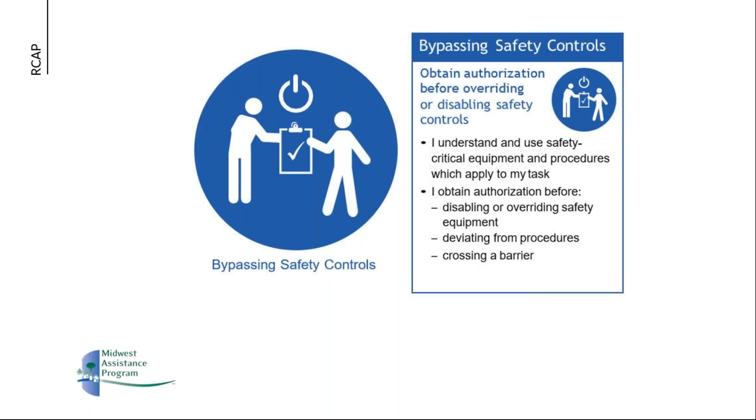Bypassing safety controls. So safety controls are frequently bypassed purely out of convenience. Smoke alarms are disabled because the work activities that we're doing are kicking up dust. Blower fans are shut off because they're too noisy, they're too difficult to talk over. Safety switches are disabled just because they're inconvenient. We must teach our staff that they are required to obtain authorization before overriding or disabling a safety control. They must obtain authorization before deviating from a procedure, and they cannot cross a safety barrier without approval.

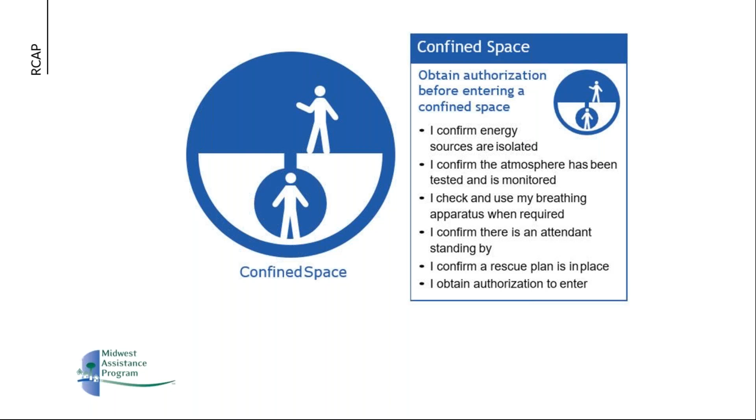I'm sure all of us are familiar with tragedies that have occurred in confined spaces. We must develop and enforce a confined space policy. Confirm that the space is energy free. Confirm the atmosphere is safe to breathe and being continuously monitored. Insist that breathing apparatus is on site and that people know how to use it. During a confined space entry, an attendant who has no other task other than to be the safety lookout must be present. Confirm a rescue plan is in place and do not enter until a subject matter expert has given their authorization.

For most of us, driving to and from work and driving while at work will be the most dangerous thing we do on any given day. Develop a driving policy. Make sure your people wear seat belts. They follow the speed limit. Reward them for slowing down when road conditions call for it. Do not allow them to use phones or other distracting devices while they're driving.

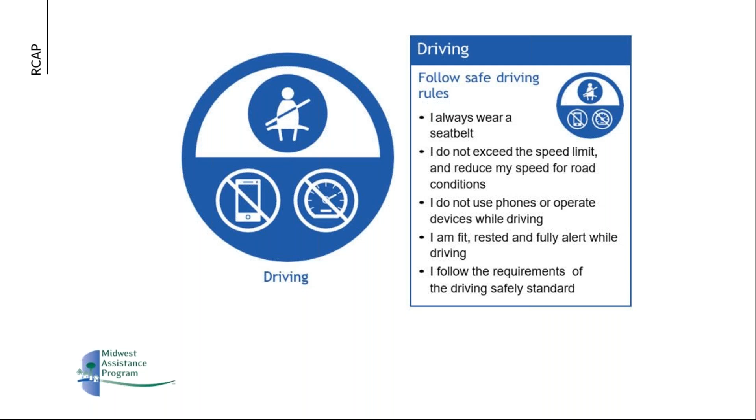Are the vehicles in good condition? And are our employees well rested? Are they healthy enough to be driving?

Energy isolation. As an industry, why do we continue to allow our staff to work on energized objects? We should be teaching them to identify all potential energy sources, develop a policy that mandates all energy sources are isolated, locked, and tagged, teach our staff to test for residual or stored energy.

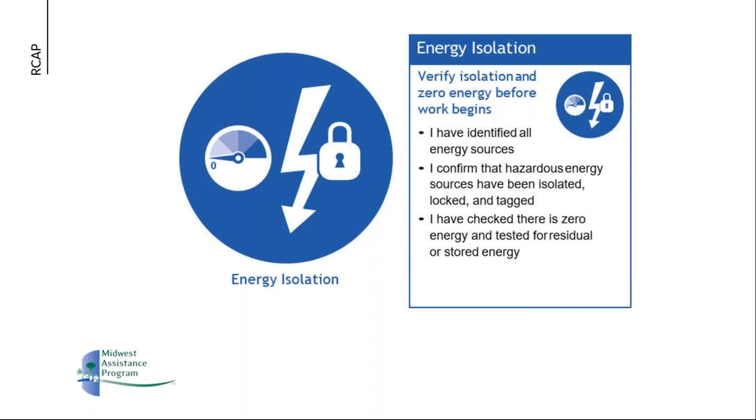Hot work is a process that develops enough heat to start a fire. Prior to doing any hot work, our staff should be trained to identify any ignition source and remove or isolate any flammable material. Do not start hot work without authorization from a subject matter expert. When working in hazardous areas, do not start work until the atmosphere has been tested, and we continue to monitor the atmosphere while the work is being done.

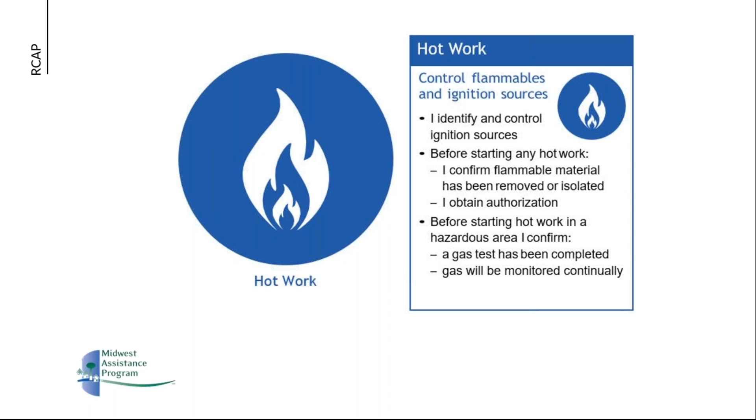Line of fire. We've got to develop the policies to where we teach people to keep themselves and others out of the line of fire. Don't let them position themselves to where they can get hit by traffic, hit by a broken chain or a broken cable, or put yourself in a position where something can be dropped on you. Let's teach our people to establish barriers and exclusion zones. Let's limit our loose tools that could become potential dropped objects.

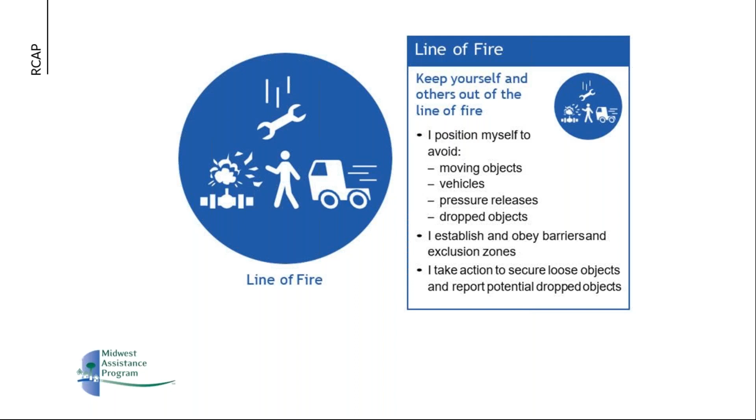When it becomes necessary to use equipment to move something on our job site, let's take a couple of moments and develop a lift plan. Let's get control of the area. Do we know how heavy the object is? Is our equipment capable of lifting it? Have we inspected our slings, the rigging? Are they in good order? Are they fit for purpose? Is the equipment operator qualified? Establish and obey barriers, exclusion zones, and never allow someone to walk under a suspended load.

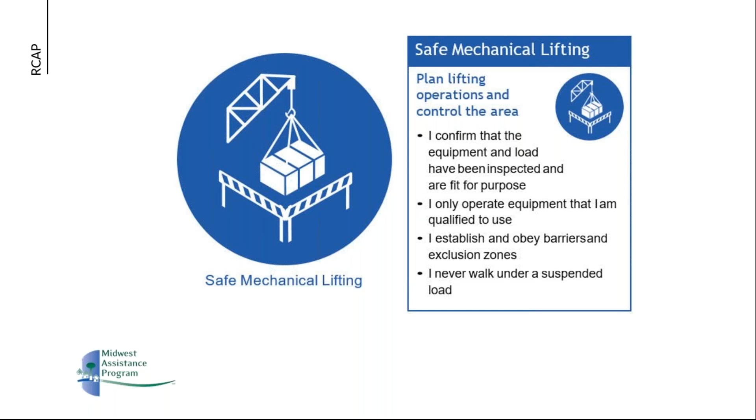Work authorization process. So this is where we develop a program of work permits. These would be used in our operations with increased hazards. They can also be used when we have newer employees, employees with less experience. Teach our staff to check if the permit is required. Confirm that our staff is qualified and authorized to do the work. This permit can be used as a safety checklist to confirm that hazards have been controlled.

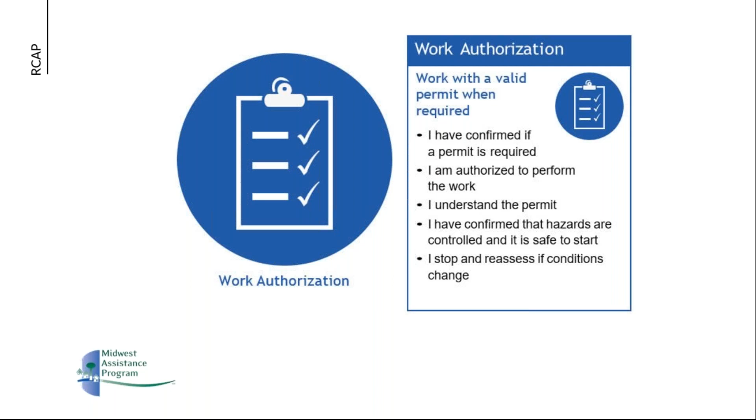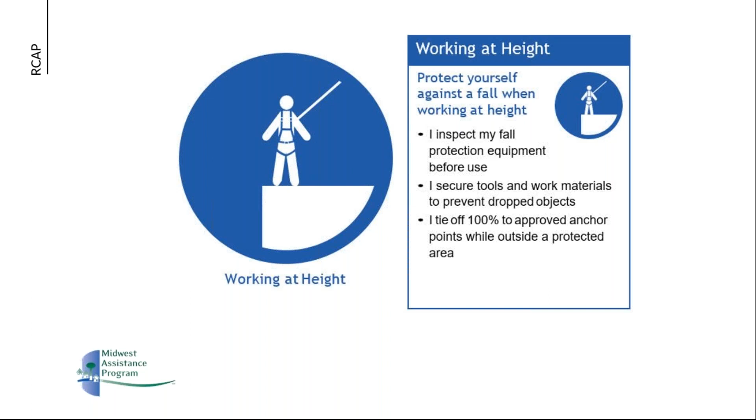Working at heights. My personal experience has shown me that this is probably the most misunderstood rule of all. Staff do not understand or appreciate the risk they put themselves in. They don't understand how dangerous a 3-foot fall actually can be. And it's not uncommon for workers to put a 12-foot lanyard on when they're only working 6 feet off the ground. Let's teach our staff how to protect themselves from falls, how to prevent dropped objects, and install and identify proper anchor points.

So you might be sitting there thinking, this all sounds great, but how do we do that? Where do we start? Well, we start with little steps. It's going to take a little while, but you start by reevaluating and documenting your organization's priorities. We set up policies and procedures that align with the life-saving rules, and we take time to evaluate hazards, review past incidents, and seek the proper mitigations.

Does your organization hold pre-job or pre-task toolbox talks? This is where we discuss the goals, hazards, and we give out safety reminders. Be on the lookout for dangerous mindsets. You know, the guy that says, we've always done it this way. Well, this is how I was trained. Or we're in too big of a hurry to do all that.

Lastly, investigate incidents where safety policies were violated. Seek the root cause of what happened. Most organizations stop the investigation when they find out who did it, but they don't find out why they did it. Hold staff accountable for their actions, and enforce a zero tolerance policy for blatant, intentional violations of the life-saving rules.

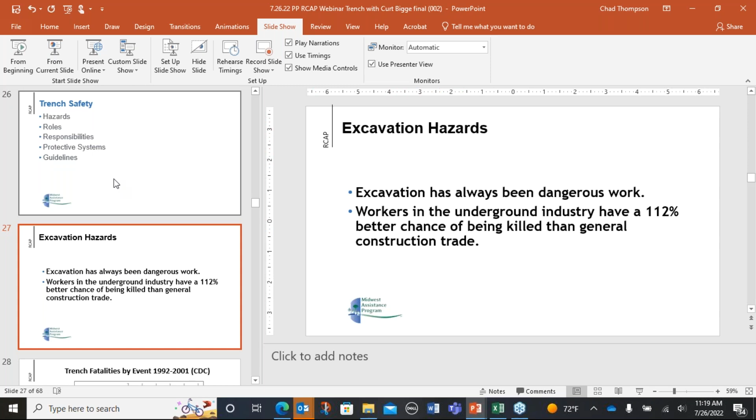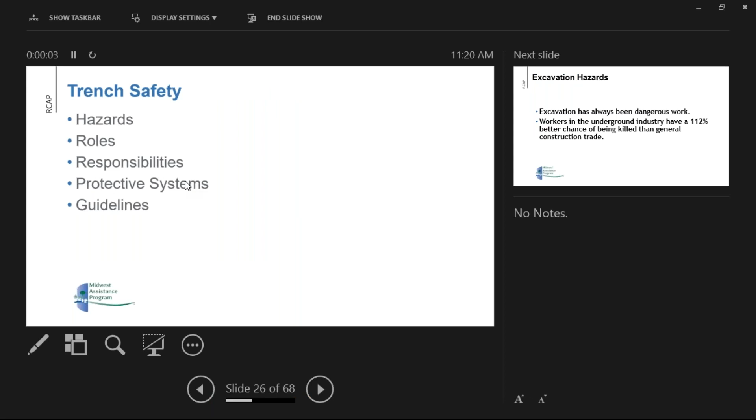Hey, Chad, could I interrupt for just a second? Yep. Could you start that slideshow from your current slide? We're seeing multiple slides on your screen. Oh, sorry. It's that second one over from the left. Did it change? Is that better? And then can you swap your display settings? That's the middle drop down there. To presenter? How's that? There you go. Thank you. Perfect. Is that coming through? Yep, looks good. Thank you. I'm not hearing Jim now. Coy, do you want to let him know he's good? Hello? Yeah, you're good to go. Let's continue the presentation. Great. Can you hear me now? Yep, we hear you. Okay, I can't hear anything, but in here.

So excavation hazards. Excavation has always been a dangerous industry, and as you can see here, you have a much higher likelihood than your general construction trades to be killed. I apologize for this, everybody. So here we go. From 1992 to 2001, according to the CDC, there were over 400 deaths in excavations, where if you combine all other events in the construction industry, you were less than 100.

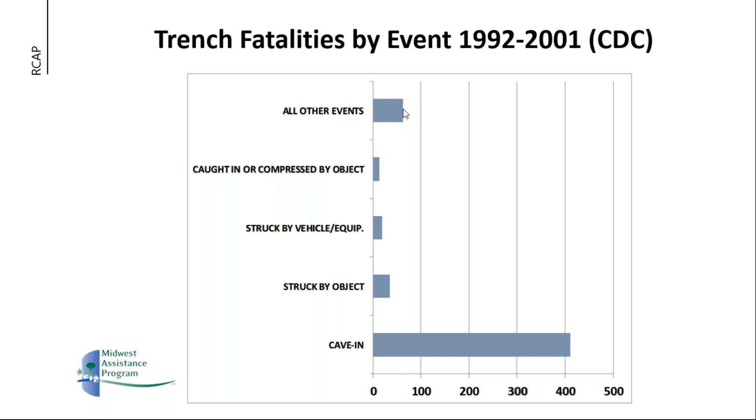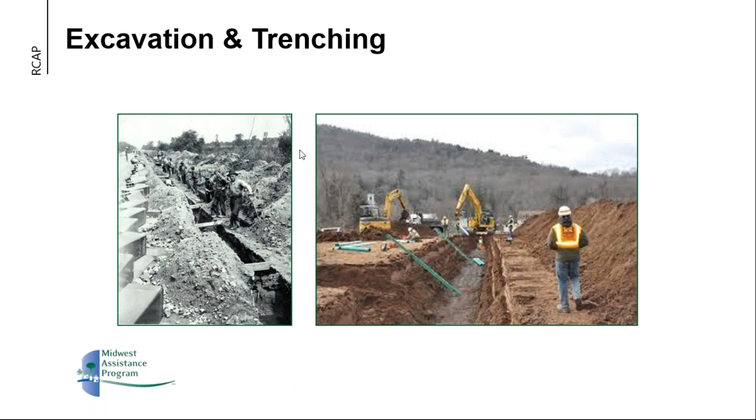So what is a competent person? A competent person is someone who is capable of identifying existing and predictable hazards in their surroundings or working conditions which are unsanitary, hazardous, or dangerous to employees, and who has the authorization to take prompt corrective measures to eliminate them. I would encourage everybody to let all staff take prompt corrective measures to eliminate any hazards or stop a site and get everybody out of the trench and discuss any safety concerns that may happen during work.

So roles of a competent person: they're responsible for the overall safety of an excavation. They should be knowledgeable in soil classification. They're going to select the proper protective system. They're going to represent the employer, or be one of the people representing the employer, in an OSHA visit. They're usually going to be the first person when OSHA stops on site. They're going to ask who is the competent person on this site. They need to be there and able to answer their questions.

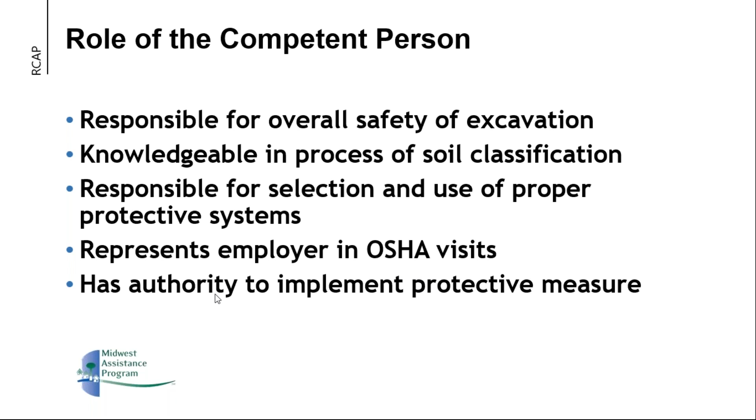And they need to have the authority to implement protective measures. They're identified in writing by their employer, so that has to be a designated person. You can't just make it up as they get there. They're a key piece of any safety program. They're required on any site that has an excavation. So it can't be the foreman who runs off to go get material or somebody who's not there. Whoever is the competent person needs to be on site and monitoring the situation.

Qualifications and the ability to conduct the job. And it doesn't have to be a foreman or a supervisor anymore; many companies are training all of their staff to competent person levels. But there is going to be one who's designated and signs the paperwork and is the competent person for the site. But it's a good idea to get all your staff trained to that level and able to identify and know the hazards before they cause a problem. So with that, who wants to be the competent person?

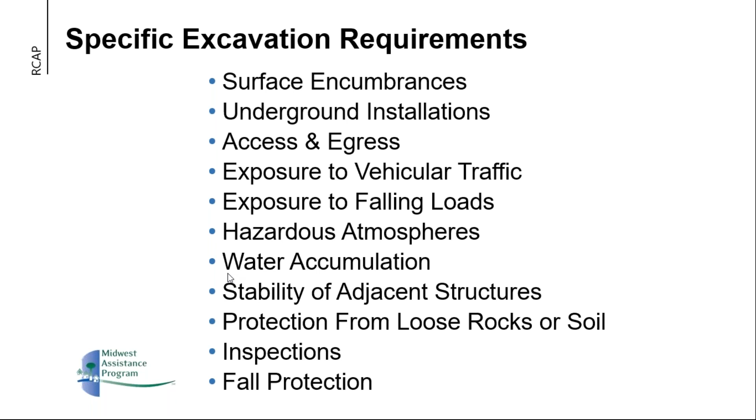Excavation requirements. So these are some things we're going to touch on: surface encumbrances, underground installations, access, egress, exposure to vehicular traffic, exposure to falling loads, hazardous atmospheres, accumulation of water, adjacent structures, loose rocks, inspections, and fall protection.

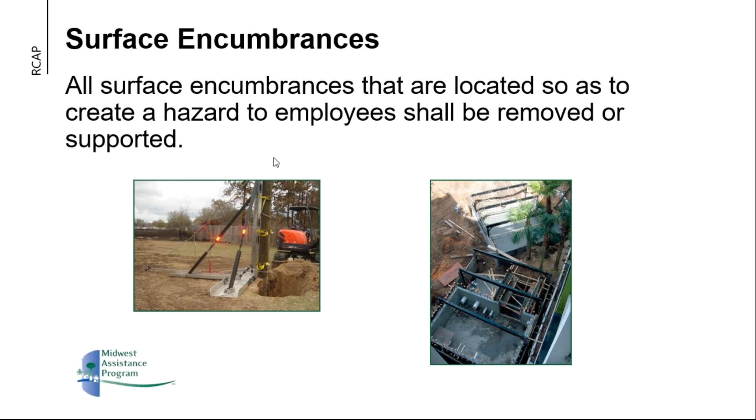811, with most of the people having over 10 years experience, I know we're all familiar with the National Call Before You Dig Center. Things to keep in mind: if you call on a Monday morning and say you want a mark out, they have 48 hours to mark out, but that's not from the time of call. That is from the next business day. So if you called Monday morning, you wouldn't be able to dig till Thursday morning, because Monday doesn't count and they would have Tuesday, Wednesday.

If there is no mark out, you're still not clear to dig unless you've received an email or a phone call saying you're clear to dig from all underground utilities. So I would recommend stopping by the site on a Wednesday afternoon, making sure you have your mark out, and if not, calling back in with your ticket number. Let them know you have no mark and you're going to have staff and equipment on site in the morning, and that typically will get them out there, whether it's overtime or not, to make sure you're marked out and ready to go.

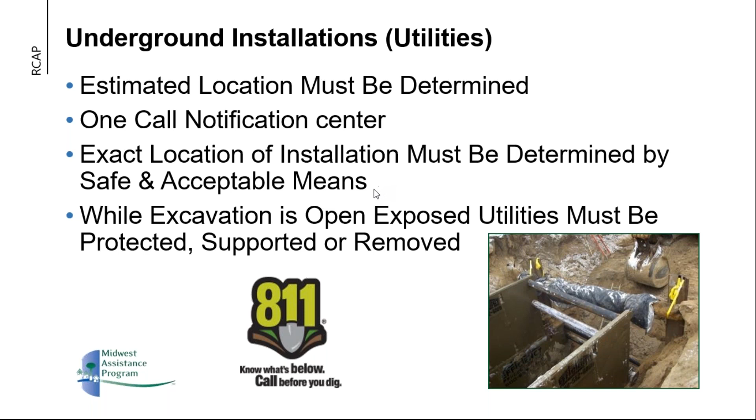Access and egress. Once you have a trench that's over 4 feet, you're required to have a ladder. Doesn't mean you need to wait for the 4 feet. And that ladder has to be within 25 feet of access. So I recommend putting your ladders in every 50 feet or even a little shorter. That's always going to keep your staff within 25 feet and make sure they have a way to get out with safe travel.

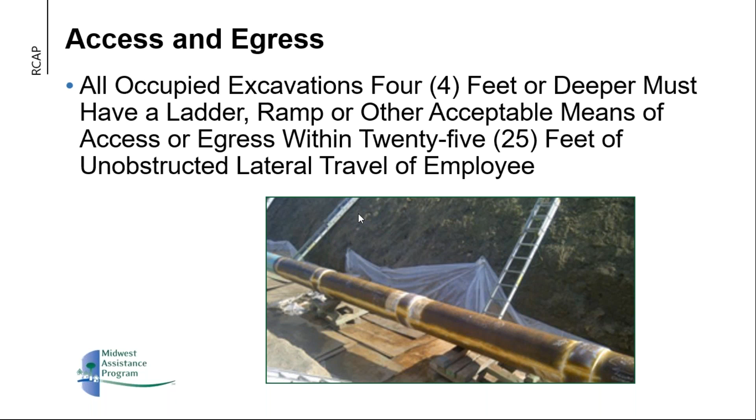Vehicular traffic. Know your roads. Each area is going to be different and have different regulations, but the road is going to determine your sign spacing, your cone spacing, even your PPE. If it's a certain class road, you may need a type 3 vest, which would have sleeves on the vest and more reflective material. Some areas require you to have pants with reflective material if you're working night work. So it's important you know the road you're on and what your local regulations are.

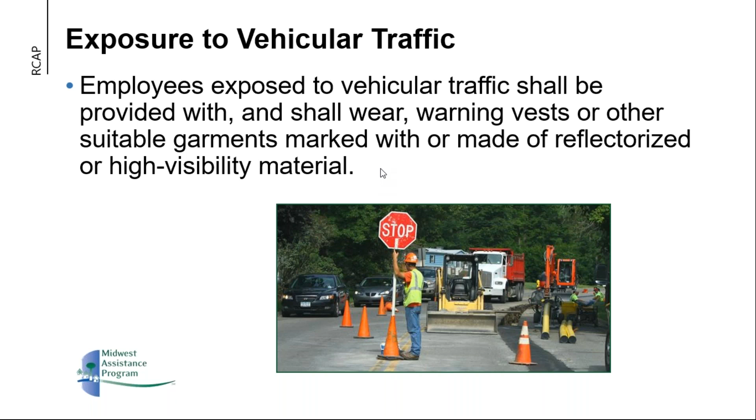Falling loads. I like this picture because they're using taglines. Taglines are a big thing. And as Curt mentioned, never let anybody stay in the shield while the next load comes over. Even if you're laying pipe in a trench shield that is longer, make sure the pipe is coming into the shield in between the two pipe layers. Never swing it over somebody's head. And these big pieces of equipment you're moving, make sure you have those taglines to situate them and get them in place, and then put your staff back in the trench to put your pins in and lock it in place.

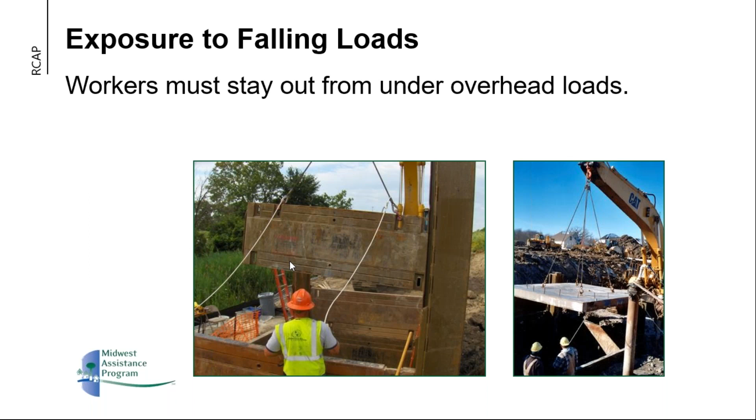Hazardous atmosphere. If you're working in or around landfills, chemical plants, wastewater plants, refineries, gas and diesel tanks or swamps, you should test the air. But really, anytime you suspect there could be an issue. Quick story here: we were doing a sewer replacement many years ago, about 14 to 16 feet deep in the middle of an intersection, and the guys smelled petroleum. So we monitored the air, and it wasn't enough to set off the alarm, but we threw a 30-inch blower in there to make sure they didn't have to breathe that smell of the petroleum products.

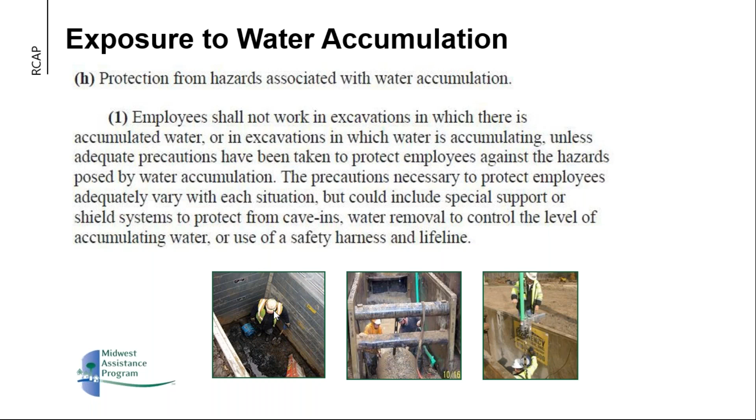And do the best you can, but it has to be safe for the employees. There are times you're going to have to deal and work in some water. We all understand that, but make sure you're doing what you can to make it safe and you're not letting them be exposed to any hazards.

Stability of adjacent structures. So ideally, we would never have anything built within our easements or near our lines. But if you do find you have a problem and it's next to a building, a bridge, or any of that kind of stuff, a registered professional engineer would be required to design the underpinning for those kind of structures. The competent person can make sure that all your sidewalks, your pavement, walkways are supported.

And if for some reason you're doing service lateral replacements or something and you are boring under a sidewalk and you're going to leave it that way overnight or let people use it, that needs to be supported, or if you're letting people get under there. So you need to shore that as well.

What we've done is rolled chain link down that bank and pinned it on top. And we just had a couple of staff moving the chain link as we were laying pipe along through there. And it's a good way to hold that loose rock back from sliding down on anybody in the trench laying the pipe.

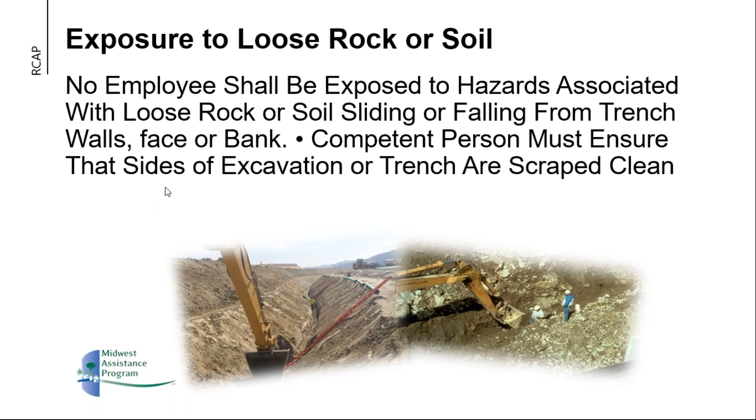So, inspecting of the trench. A competent person must make an inspection of the excavation at least once a day at the beginning of the shift. Additional inspections must be made after a hazard increasing event, rain, earthquake, those kind of things. Things that must be included in the inspection are the soil type and composition, if not assumed type C, which we'll get into in a minute.

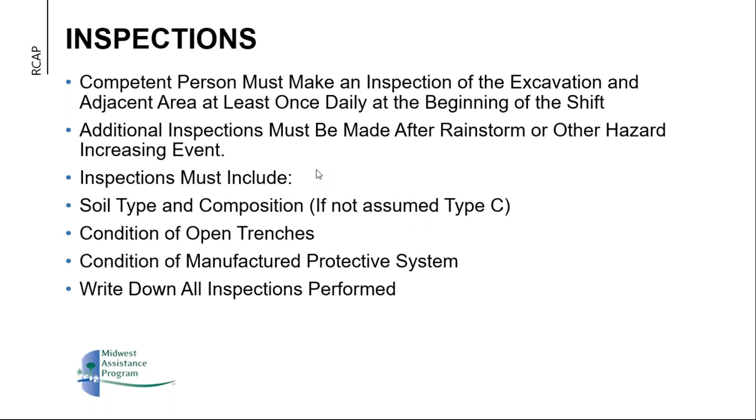Condition of open trenches, condition of the manufactured protective system or the shoring, the shield, the box, and you should document all your inspections. So OSHA requires a minimum of one inspection per shift, but the process is continuous. The competent person designs, constructs and maintains a safe working area.

But again, I would recommend you encourage everybody to constantly monitor and observe things and give everybody the authority to stop work, everybody get out of the trench and have a meeting if there are safety concerns. Don't put that on one person's shoulder or expect one person to see everything. More eyes are always better.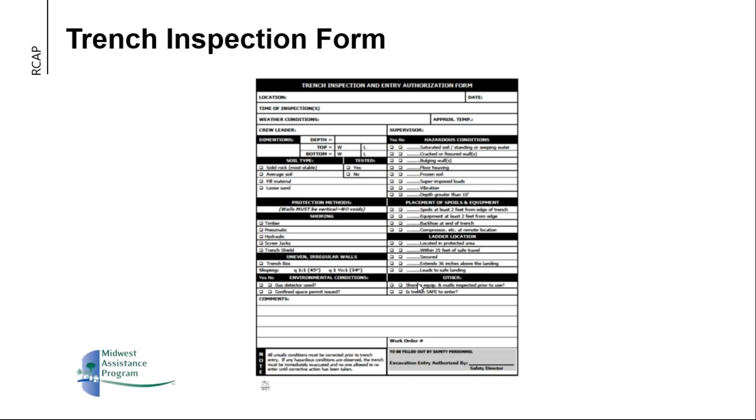Is your ladder located in a protected area? Is it within safe travel? Is it secured and tied up to something or staked in? Is it 3 feet above? And does it have a safe landing? If you suspected there was bad air, did you use a gas detector or did you issue a confined space? And then this is just saying that you inspected your shoring equipment prior to use and it is safe to enter. And any comments?

Fall protection. If you're setting something up like this picture on the right that's more of a long-term excavation, you're required to have a guardrail around the system, and you should protect for fall protection at all times, but it's required for these pits or shafts, something if you're going to be boring or working on something more long-term. You can't quite see it in the picture here, but this ladder is coming up on the side. Then they'll have a chain and a platform right there where somebody can get in, and the chain should go back up once the person has entered the area.

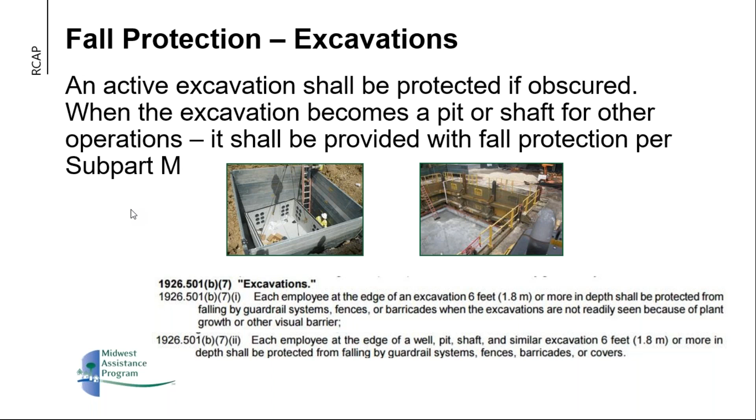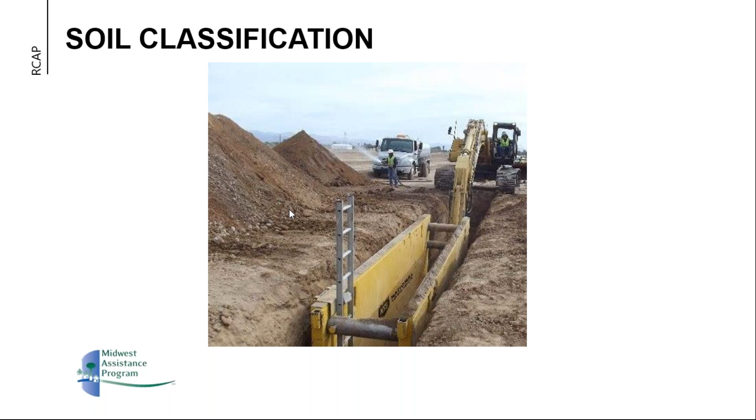Soil classification. If you're classifying the soil, you want to take that sample and classify the soil as soon as it comes out of the trench. I believe you have an hour, but I typically try to do that as soon as the material was being pulled from the excavation. You don't want to go grab from a spoil pile that's been sitting out forever, and you don't want to go grab from that spoil pile after he's wetted it with the water truck. You want to do it with just the native soil straight out of the trench.

So if a cubic foot of dirt weighs between 90 and 140 pounds, you have to think a cubic yard is roughly a ton and a half.

Another quick story here. When I first started at the water district, a coworker was always limping around, and I know he went to the doctor a lot. He had been there before, and come to find out, he was laying pipe in a trench not much more than knee deep, and it sloughed off. And about a year after I started, he got medically retired at roughly 40 years old and lost his job with the public sector from laying pipe in a trench just over knee deep. So don't feel like if it's shallow, nothing can happen.

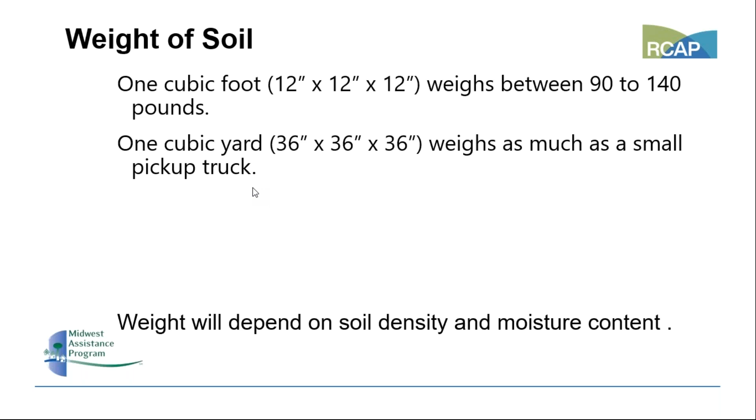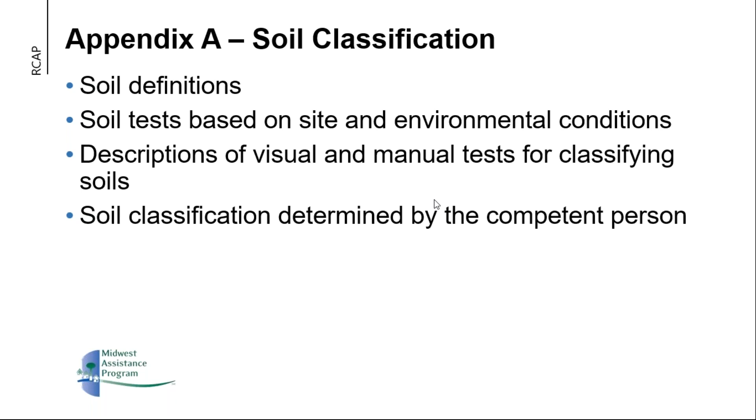Soil classifications require soil definitions. The soil is based on site and environmental conditions. To classify soil, you must perform a visual and a manual test, and that's got to be done by a competent person. So the one exception to this rule with OSHA is if you consider it a type C. If you consider it type C soil, you don't have to test, and that is becoming more popular in the industry, especially with those of us already working for the public sector who are out making repairs. Typically, we're digging in pre-disturbed and saturated soils, or at least wet soils.

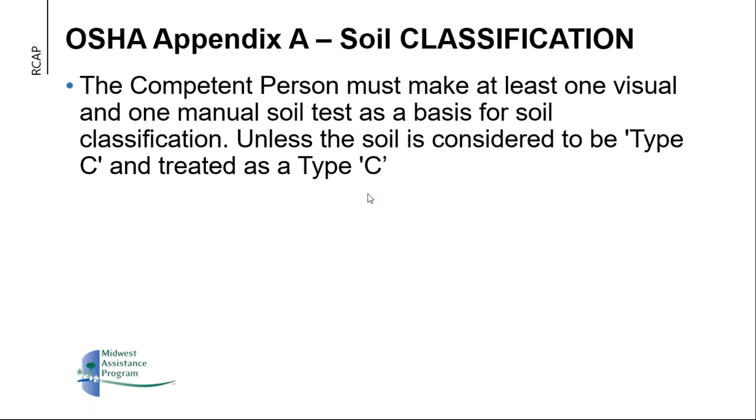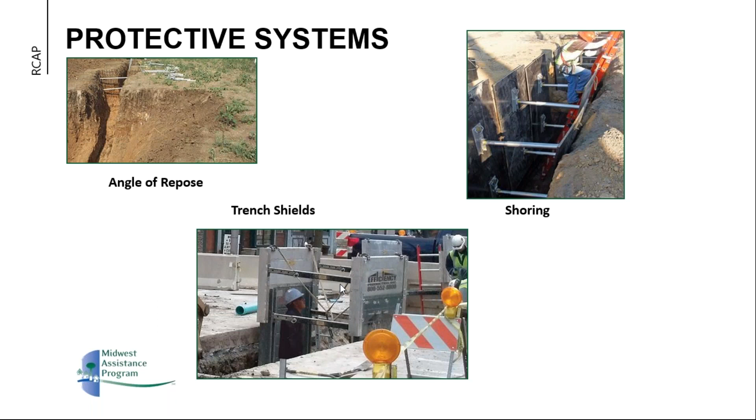Your different types of protective systems: you have an angle of repose, or sloping, or benching, shoring. I like this picture here. You see they're using the fin form or sheeting. That is typically what we always did if we did use shoring, and trench shields or trench boxes. Protective systems. Every employee working in an excavation over 5 feet must be protected. Again, your options to protect them are an angle of repose, shoring, or shields and boxes.

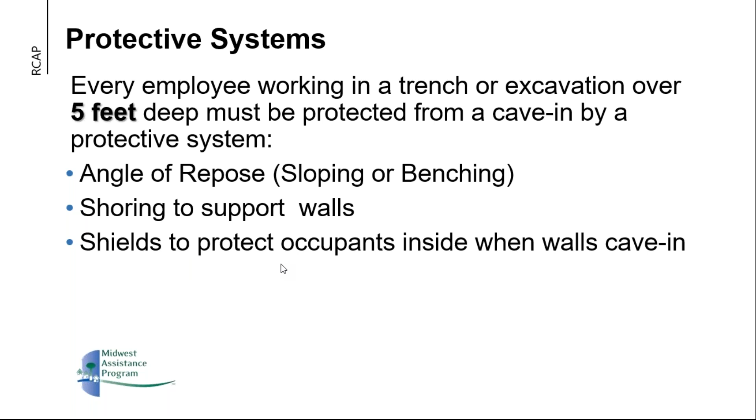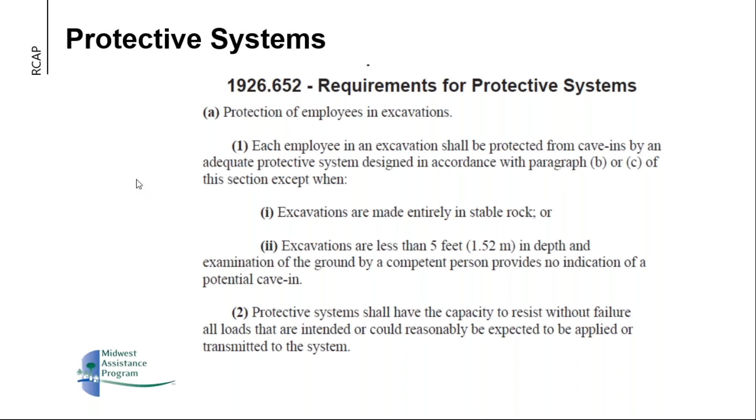So here is straight from the OSHA regulation that every employee shall be protected from cave-ins. The exceptions: number one here, the excavation is made entirely in stable rock, which again, I don't know how you're going to dig in stable rock and keep it stable. Or two, it is less than 5 feet, but here's the kicker, and the competent person provides there is no indication of a potential cave-in. We're going to get into a slide here in a couple that shows just exactly how many injuries happen in less than 5 feet. So a competent person can design a protective system for depths up to 20 feet. Greater than 20 feet, a registered professional engineer or manufacturer's tabulated data is required to design that system.

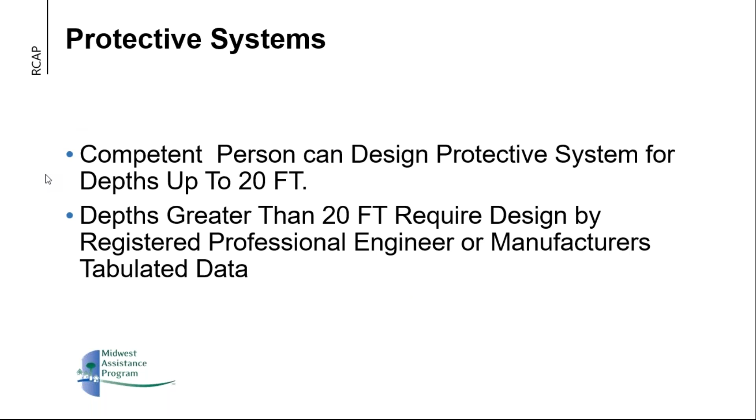The 0 to 5 feet, you see 37% of your injuries and deaths. And again, this is just my assumption, but I would say that's many times where the competent person says it's okay to get in there and do something, and now somebody doesn't go home or goes home in a wheelchair or permanently injured. So keep that in mind when you're out there doing that work. Do you want to be the person who put that person in that trench and didn't let them go home or go home the same?

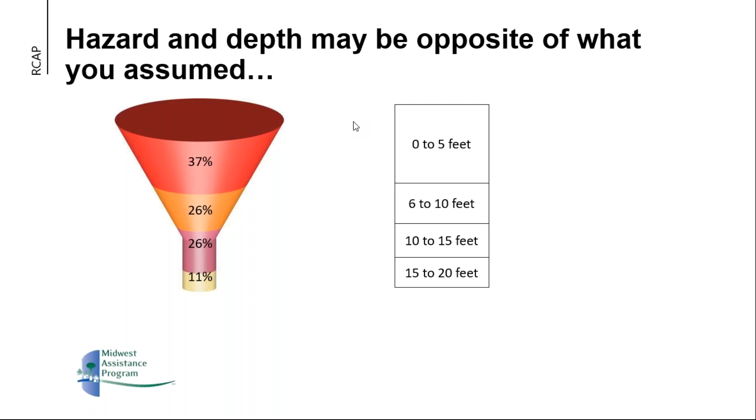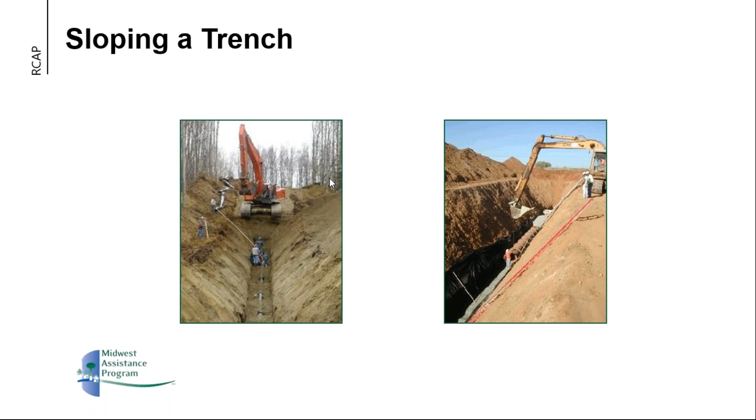So sloping, here you can see a couple of pictures of slope trenches. The one downside to sloping is you can tell they cleared timbers for this project. The amount of room you need to do the work, it's pretty wide, and it even looks like they're throwing a lot of their spoil up around the timber, which I don't know how they're going to get all that out. But that's the downside to sloping. It is nice if you're doing new construction in an open area, but it does require a big footprint.

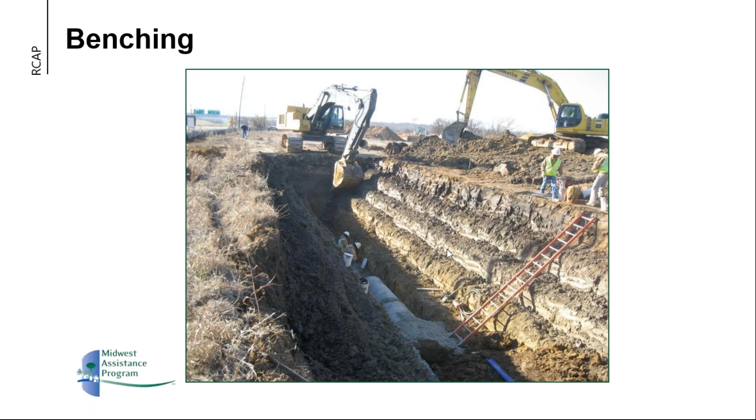Benching is probably your pipe layer's favorite type of protection. These benches are usually 2 feet each way until the bottom, and then it's generally 3 feet. It's nice because you have the shelf to set your tools, as you can see in this picture here. The staff can get in and out of the trench really about anywhere easily and safely. The downside, again, is the amount of room it takes. And two, it takes a skilled operator; not all operators can dig and give you a nice clean bench. This to me is not the prettiest benching I've ever seen, but it is protected.

So description of a trench shield. A shield is a movable box strong enough to protect the employees, but light enough to handle. And by handle, they don't mean the people in the trench. That's going to be the backhoe to drag it along and work with it as you go. Ideally, it would be 4 inches narrower than the width of the trench, so the backhoe can hook the cable to it and drag it along if you're using it in a dig and lay operation. And it's got to be rated for the depth and the type of soil that it's being used in.

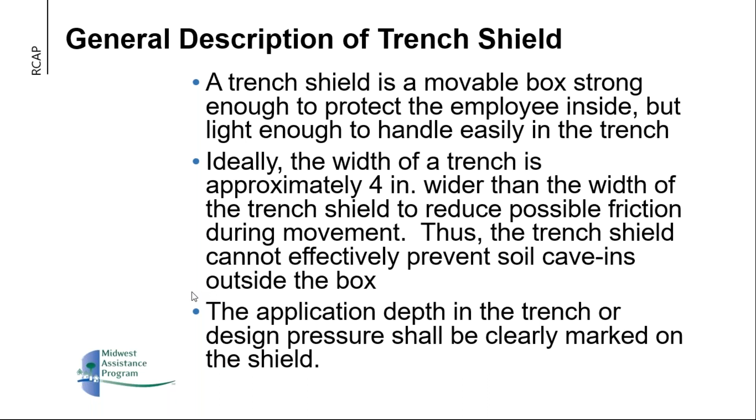Manufacturer's tabulated data shall be on site. It should be available for OSHA, but it should also be available for your employees to make sure you're putting them in the proper safety equipment to withhold the material that you're putting them in the trench on.

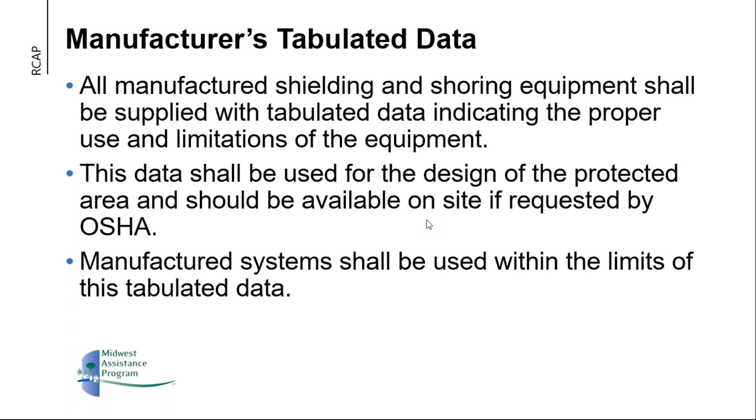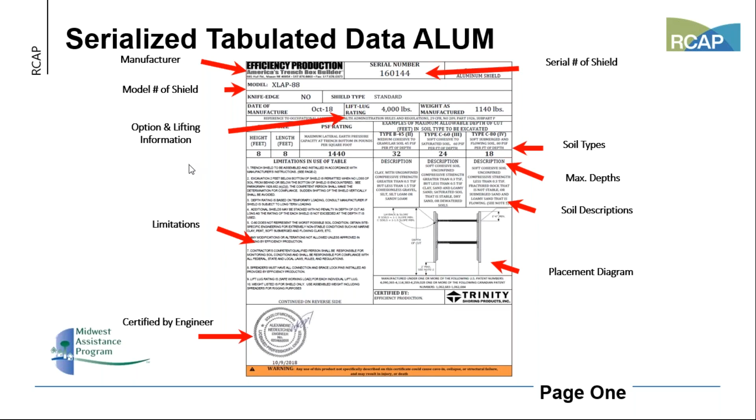Here's an example of some tabulated data for an aluminum shield. You can see it has a manufacturer, serial number, model, your lifting, how much lifting pressure you can put on it, then your soil types. So this is where you can see on a B45 or a type B, this trench shield is rated for 32 feet, or on a C80, it's at 18 feet. It has your soil descriptions, your placement, and the big thing is a certified engineer stamp down here on the bottom. That tells you that it's rated, but it's up to you to properly classify your soils, make sure you're selecting the proper shield that matches for the soil conditions on site.

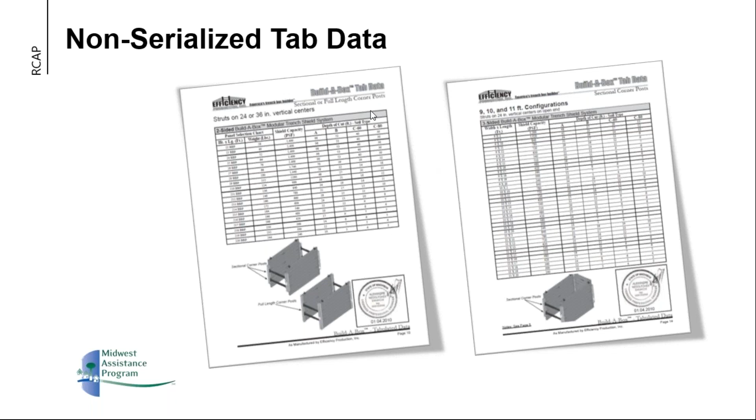Here's an example of some non-serialized tabulated data. I know this is hard to see, but it's going to be dependent on the width of your shield. Is it stacked? It's going to break it down for different soil types. And like on this picture on the bottom right, you can see they have an end panel in the shield, which is going to make it more secure. It's a full panel. But you need to make sure you're using these within the tabulated data.

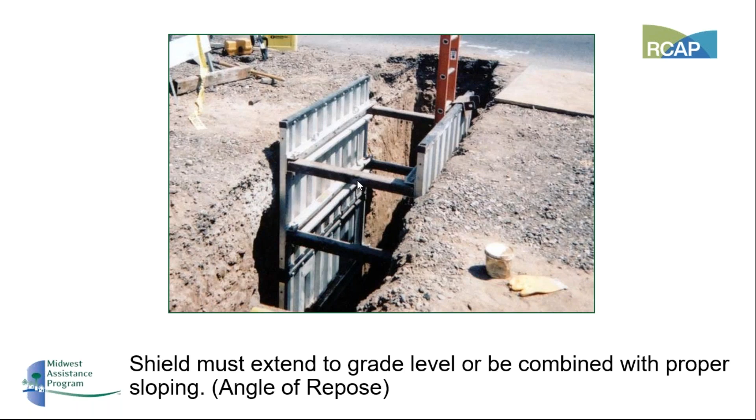All shields must stick above the ground. You can use some sloping to make it safe. If it doesn't come above the ground, this needs to be 18 inches out of the ground to the top of your shield. I'm not a big fan of the angle of repose, which is this slide here. And the reason being, if you have this sloped or using the angle of repose with your shield sticking out of this, your staff are usually standing up here on ground level for your top men who are there to help. One, they can't see in the trench to help.

Two, if your staff in the shield need to come out, they come up the ladder, you have to have another ladder on that angle of repose. I would much rather dig it vertical, stack a second shield, and have your top men be able to see, be that top set of eyes, hand them their tools and equipment back and forth. But it is an allowable method by OSHA standards.

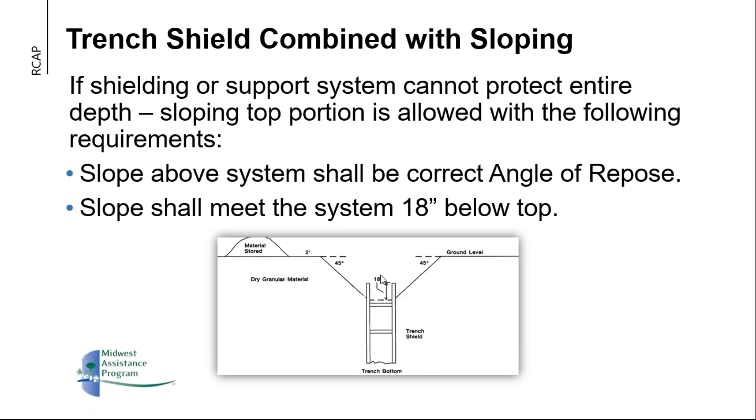The other thing, if that utility is a conduit or something that's flexible, you may have to support that. That's part of your 811 notification. You're responsible to protect all existing utilities. So if you had a wide trench, you would have to support that line while you trenched under it.